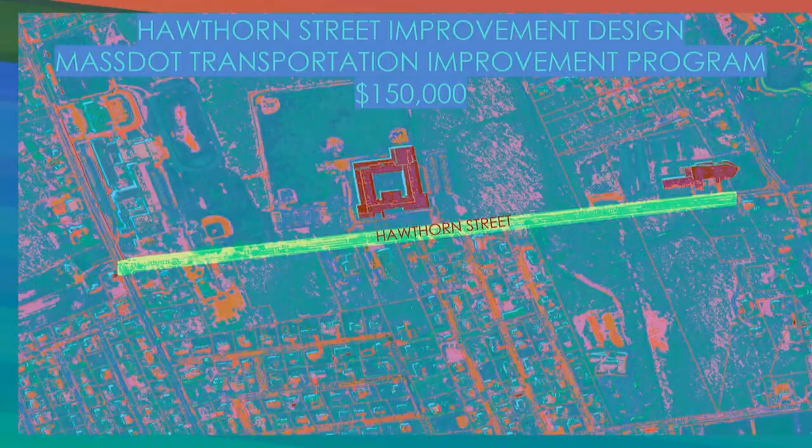This is an overview of the Hawthorn Street scope and area. We're looking for additional design fees to move forward with the design. This is the current concept design that we've submitted to Mass DOT.

We're still under the 25% design submittal. We've met with Mass DOT multiple times. We're looking at reconstructing Hawthorn Street from Slocum Road to the New Bedford line, and possibly including a portion into New Bedford to the intersection, so we can have connectivity with sidewalks, or additional shared use paths for bicycles and pedestrians. We'll also look at installing drainage improvements and intersection improvements at Hawthorn and Slocum Road.

I'm just wondering why the town's paying for these plans.

With the transportation improvement project with Mass DOT, for any town-owned right-of-way, the municipality will fund the design, and then once it's taken in as an approved project on the TIP by Mass DOT, they will estimate the funds and fund the construction.

So while we can fund a project like this — say the prices have increased, and it costs $500,000 to $600,000 for design — the state may take over the construction, which may cost $7 million. If we designed and constructed it in-house, we would have to put up all the construction funds ourselves.

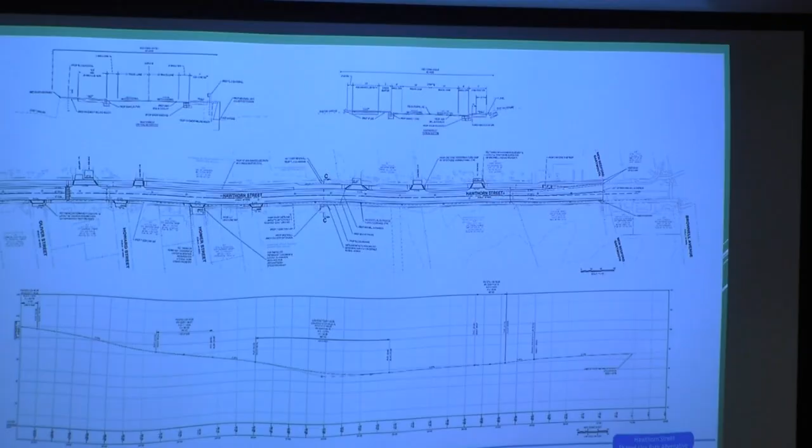Second project, Dartmouth Street Improvement Design. We started this project a while ago and submitted it to the state. It included Dartmouth Street from Howland to Prospect and Middle, and then Prospect from Middle to Elm.

There are some issues with the right-of-way of Prospect because it's so narrow to comply with all the design criteria from Mass DOT. We originally looked at a roundabout or a mini roundabout for this location.

Mass DOT wasn't happy with the design of the roundabout, specifically because it's a 5-leg intersection, which is a little awkward.

And in the vehicular movements around the roundabout, the tracking would go over the center island for large vehicles, like possibly fire engines and tractor trailers.

So we asked them to remove the Prospect Street scope and just focus on the reconstruction of Dartmouth Street, which has a wider right-of-way into that intersection.

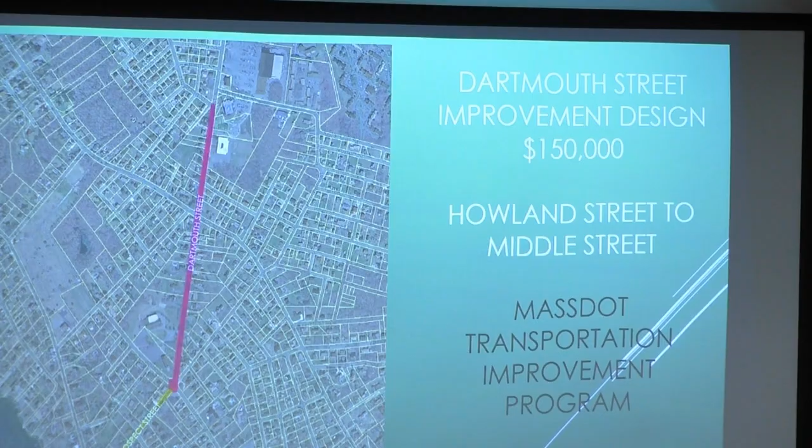Mass DOT asked us for an alternate design, so we looked at bringing Prospect Street into Dartmouth Street at a 90-degree angle. If you want to move to the next slide.

That would require land taking, and to me it's still a concern, because pulling out of that intersection directly is an issue.

Going to the intersection of Dartmouth and Middle, I have a traffic concern there. If you're hauling a trailer or something, you might get caught up if there's traffic at that intersection. So, Tim, for the roundabouts, can they reduce - are those plantings in the middle?

That's not a planting, that was just hardscape. Okay, so do they have a specific circumference that they use? Yes, they all do. They have a standard.

They're different sizes, so you can have large ones like you see down the Cape, and then they have regular size roundabouts, and they have mini roundabouts, which this is more of.

A mini roundabout fits more within the right of way, so there's less takings, but you have more vehicles that would track over that island trying to make that maneuver around it.

So you're requesting now just to go right down to the intersection at the bottom of Dartmouth Street, so you don't touch that intersection basically. Because if it's not broke, why fix it?

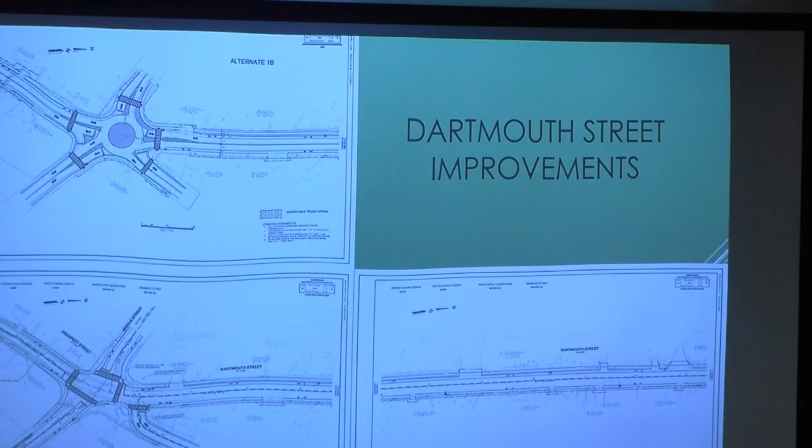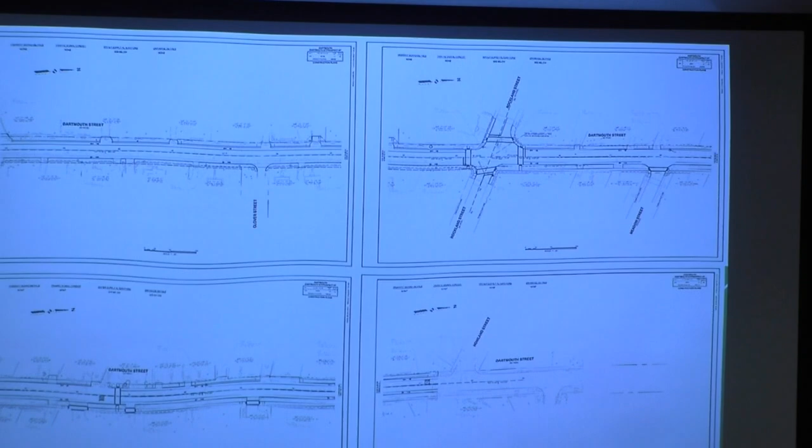And this is the rest of Dartmouth Street all the way to Howland through Meadow, with improvements including new granite curbing and sidewalk improvements, as we have in the former phases.

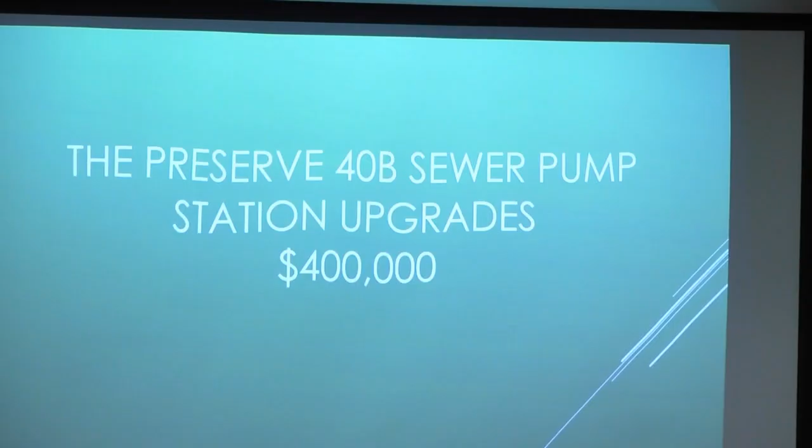The 40B subdivision has 288 units, and to be able to provide capacity in our infrastructure, 2 pump stations had to be upgraded.

The advertisement for bid had gone out, and the price came quite a bit higher than our estimate. So we rebid the project as a base bid for the Ellswick station, with an alternate bid for the Route 6 station. The Ellswick station is the most critical for capacity.

The bids came in still higher than our estimate, so we're trying to move forward with that one pump station, the Ellswick station, to get it underway and built with capacity, and then we'll try to re-advertise the second one.

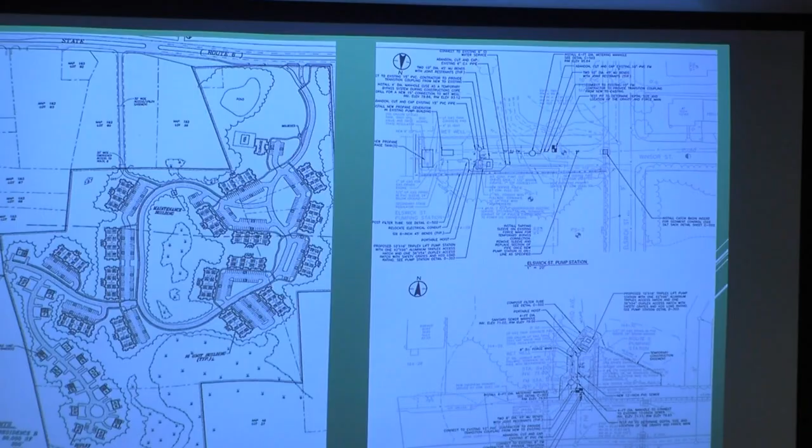Does that change what the 40B portion pays to the town? I know you had about 250,000 that they were going to contribute, in phases. But since the cost is higher, does that increase their percentage, or is that an agreement already struck that we're stuck with the rest?

Exactly. That was a negotiation done between the zoning board of appeals and the developer, and it's in the comprehensive permit - that's all they have to pay, regardless of increases in costs.

It's the same with any of our fees. Any connection fees that were updated after they applied for their permit, we can't charge them - they go back to the fees in place prior to their application, not their approval, their application.

FY '27 engineering capital improvement. This year, for FY '27, we don't have any capital requests for engineering. A lot of our engineering projects go through admin, so typically we have vehicles or equipment. Next year, we'll be looking at an additional vehicle to replace one of our existing older vehicles, but this year we don't really have any.

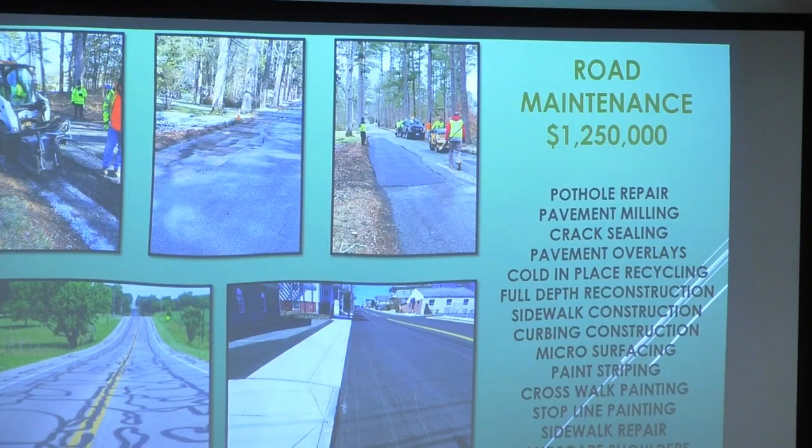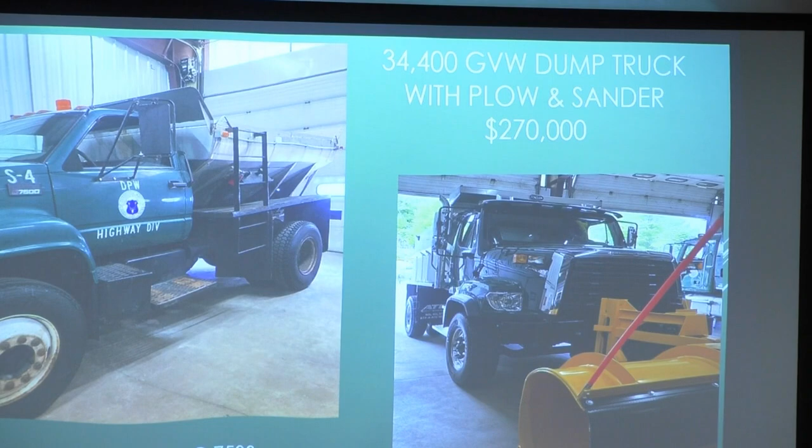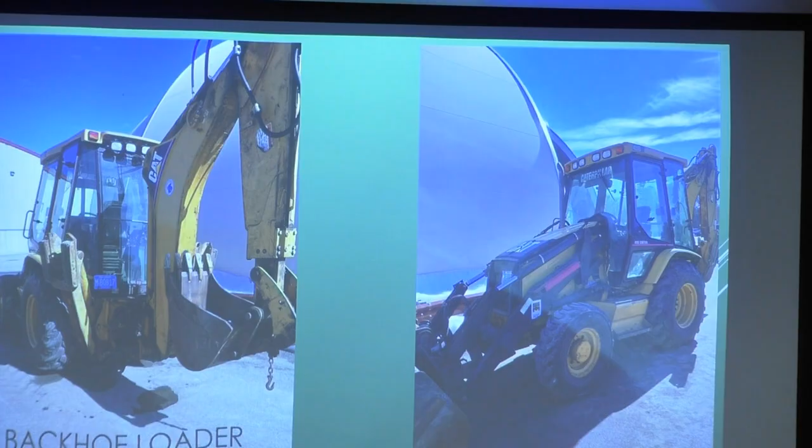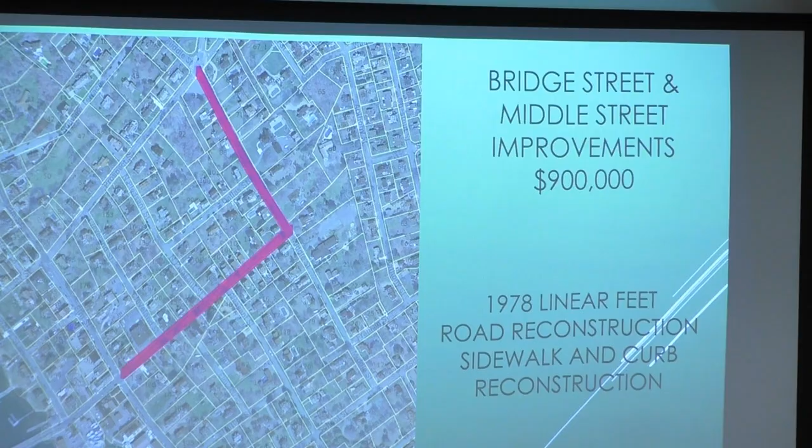Here we have our Bridge Street and Middle Street improvements for $900,000. It's 1,978 feet of road reconstruction, sidewalk, and curb reconstruction.

We've designed this plan in-house. It's 100% design, and we estimated it at $900,000.

I've also submitted to Complete Streets to see if we can get some Complete Street funding for this as well. They have increased the Complete Streets funding limits, so hopefully we can get some funding for this and move it forward.

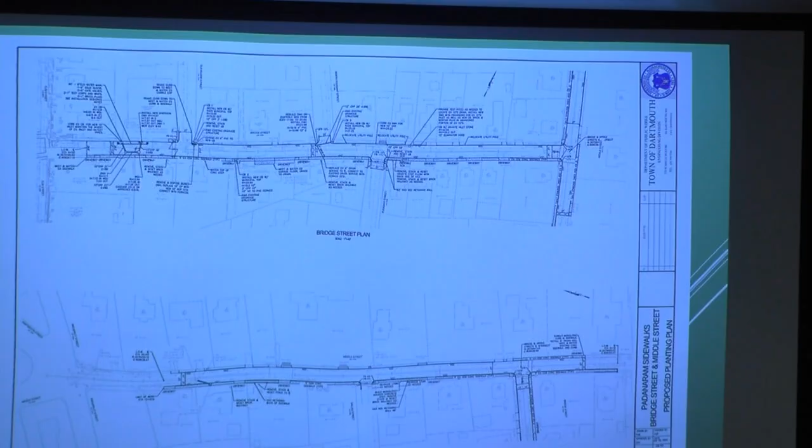Does that include the lighting and everything? No, Tim, just the base. That doesn't include any lighting or anything like that? No lighting, nope, this is just for the roadway improvements. If we add some lighting, that would be an addition.

This is our annual request for funding on Flag Swamp Road. It's 4,830 linear feet of reconstruction, about 700,000 dollars, which includes drainage improvements.

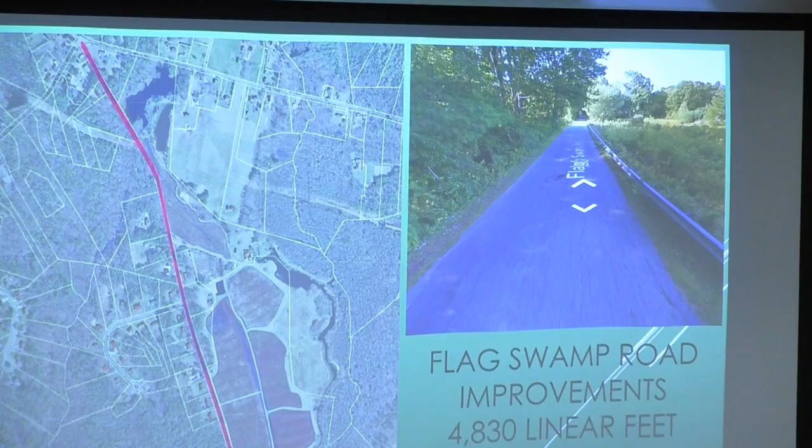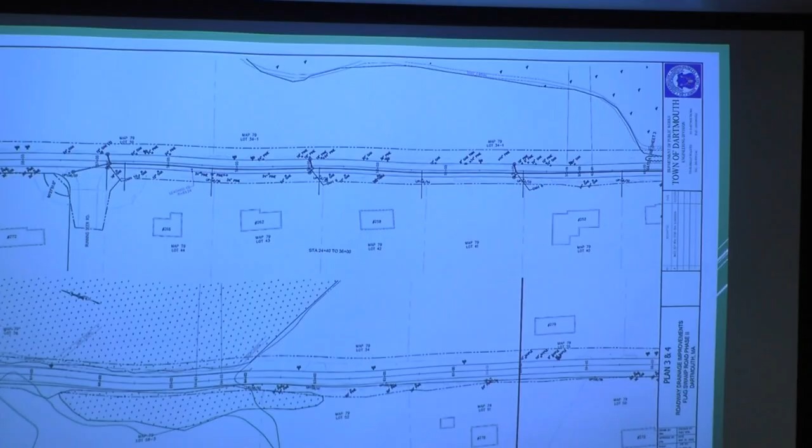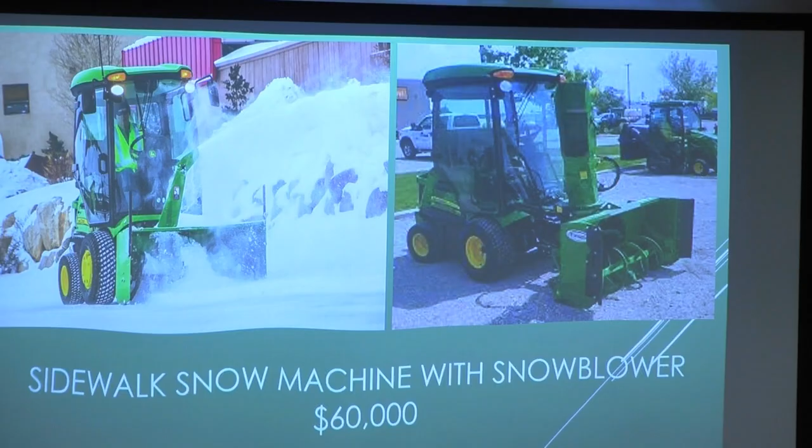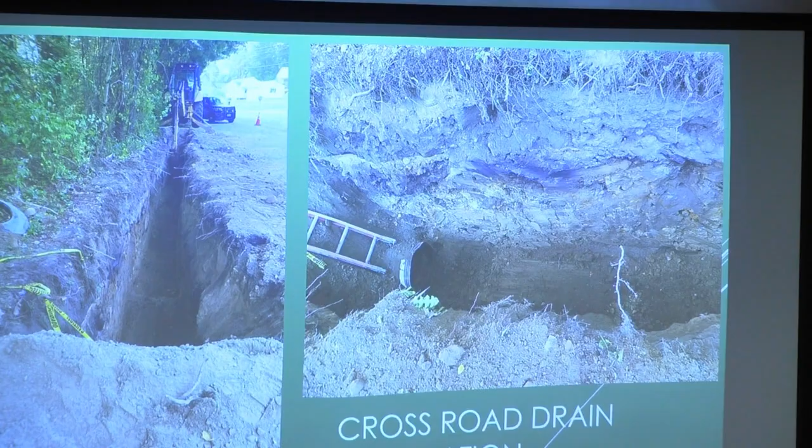These are from when we milled that section of Cross Road, put some signage up, and milled it, and after that prep was completed, we paved the road. We had a lot of feedback from completing that project.

This is the project that's just northeast of our project that's on the Mass DOT TIP plan, so that'll blend in with this project that we completed. The reconstruction with additional sidewalk improvements will be the next phase of that project with Mass DOT.

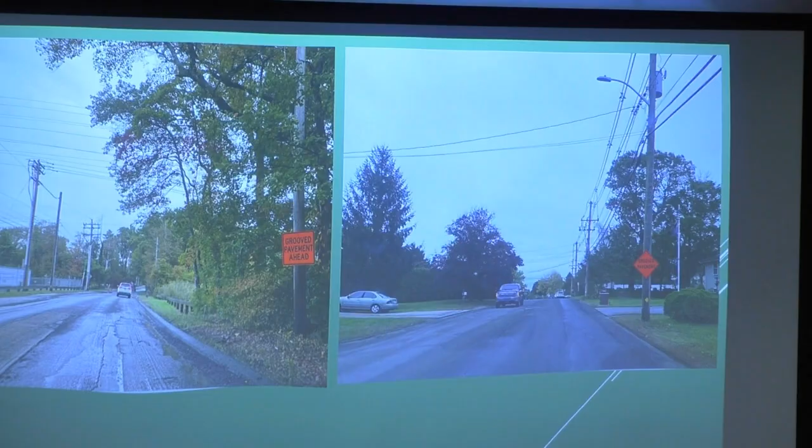These are just some of the roads around Bliss Corner that we've worked on and completed in the past couple of years.

Now, Tim, when the roads get a crown like that, like we talked about with Robert Street having the crown, is that taken down to meet the crown? So the crown is to promote drainage, to keep the rainwater in the gutter so it's not shedding across the road, especially during freezing temperatures, where if you have water sitting in the center of the street, you get a lot of icing. So it just keeps the roads cleaner with better drainage.

The sidewalk and curb reveal on Robert Street is very minimal, so we would actually have to take that road down lower rather than just doing a 1.5-inch mill and overlay. We'd probably go down a full depth or down to gravel, put down a binder course and a base course to bring that reveal back up so we don't impact any driveways or properties. Then we would reinstall new curbing and sidewalks.

That just happens over time because a lot of times we'll go in and years ago we wouldn't even mill and overlay, we would just overlay a road. You'd crack seal it and overlay it, and then you lose your curbing reveal. It's not the safest way to do it, because then cars can bump up on the curb without being stopped. With a 6-inch curb, it's more of a stop, but when you get down to like a 2.5-inch curb, you're just going to drive over it.

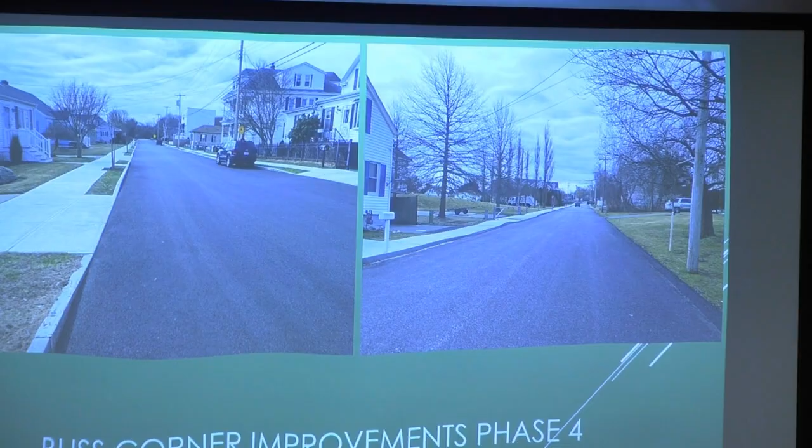And these are some of the completed streets. If you go back one - so some of the areas where you have a lot more houses, the grade works on one side where we put sidewalk and vertical curbing, and then some areas like on the right where all that land had a steeper pitch, a slope.

Installing a sidewalk there is a little more expensive because you have to retain behind it, since your sidewalk has to be ADA compliant with a maximum 2% cross slope. So then you have to retain that with either curbing or a retaining wall. So we chose to just install a Cape Cod berm, which is more economical, and you don't need a vertical stop when you don't have a sidewalk. That's why we did that.

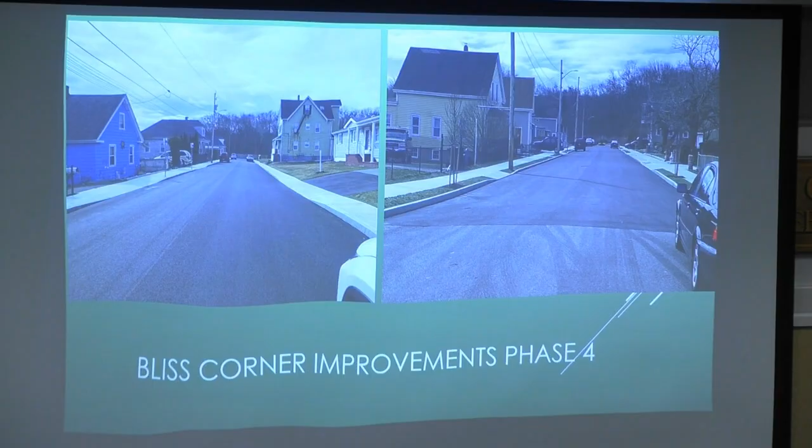Here we have sidewalks on both sides of the street with vertical curb and all concrete driveway aprons.

Same here. And here we show some of the landscape strips as well, with some existing trees, and then where there weren't existing trees, we added trees.

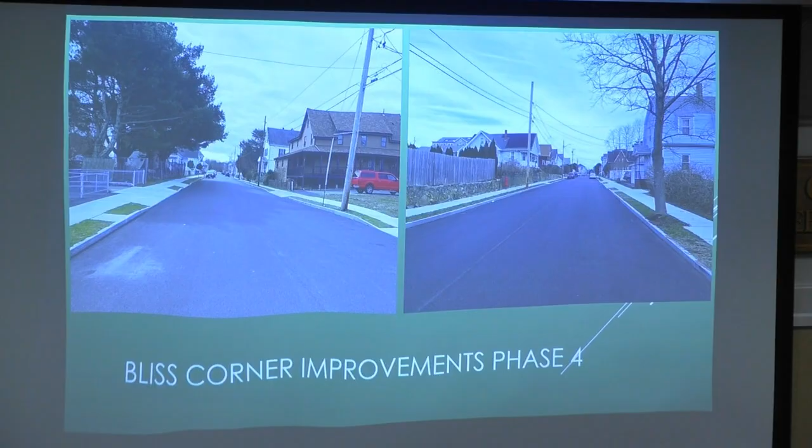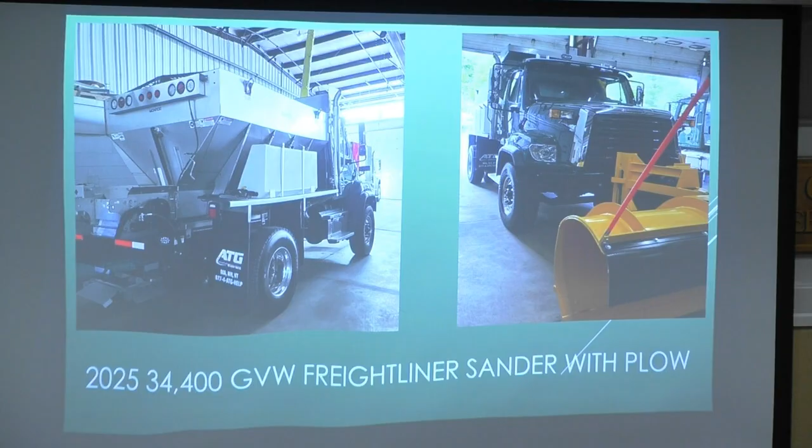Here's another one, this is a brand new 34,400 GVW Freightliner with a sander and plow. And this is the 26,000 GVW M106 dump truck with a plow, going out to actually plow.

So this one, you don't need a CDL for this? This is the one you don't need a CDL for, yeah.

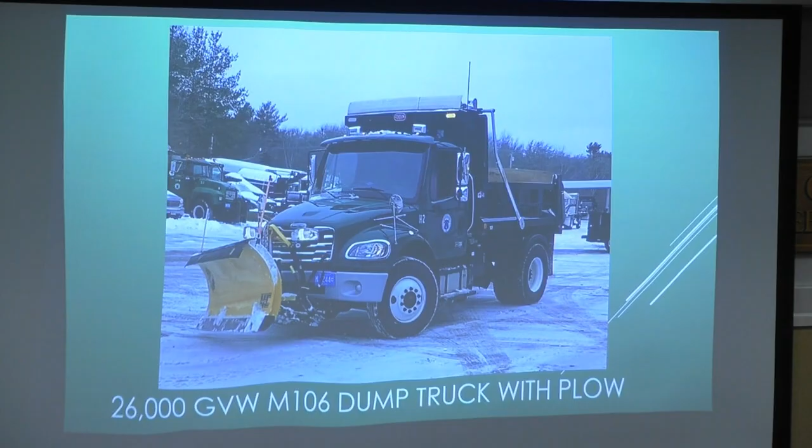FY '27 solid waste and recycling. So we have a Mack rear loader packer, still diesel powered, for 400,000. We still haven't heard on the state's requirement for electrification of these large vehicles, so we're trying to buy those diesel vehicles while we can.

And we have a... replace transfer, so we want to replace the scale house at the transfer station for about 55,000.

It's gorgeous already. Those guys are so comfortable up there. It is. The shed, it's two sheds. There's two sheds, yeah. The he shed and the she shed.

And then we want to replace a couple more of our steel containers, solid waste containers that are getting rotted and not holding water anymore. Yes, if you want to move forward.

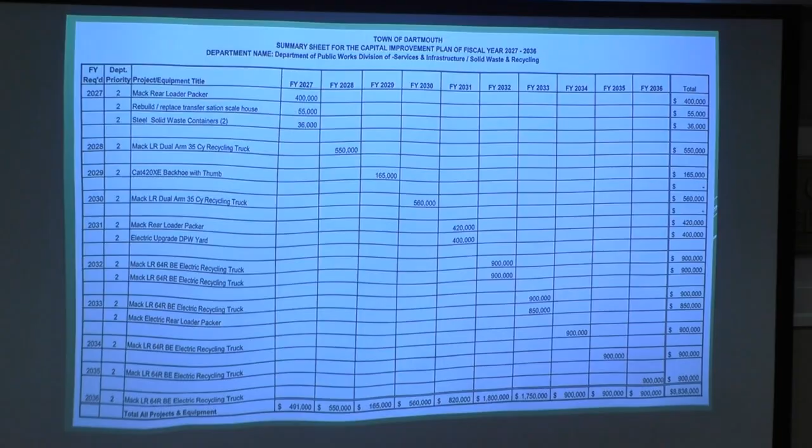So in the past, we would auction those off, but I think holding on to them for now is a better decision. So they could electrify that vehicle?

Not that vehicle, but the bill that was proposed was going to require, prior to us being able to purchase a diesel vehicle, that we had to purchase an electric vehicle.

So if it's an electric vehicle, one of these, a rear packer or a recycling truck, the costs are double what the diesel vehicles are. So they're like 900,000 to 1 million dollars, and they don't have the range that the diesel vehicles have.

So you need 2 to 1. So if we keep some of the older vehicles, we can spend about the same amount of money rebuilding that diesel vehicle. And since it's already ours, we're not purchasing another vehicle, so we can continue to use that.

Yeah, we did that rather last than this year. If you remember, we talked about it, we talked about the whole thing. 900,000 to buy an electric vehicle, and then I think we put half a million, $500,000, to rebuild. So we did pull back that article, right, so you can buy a new one? We still have that money in an article for rebuilding.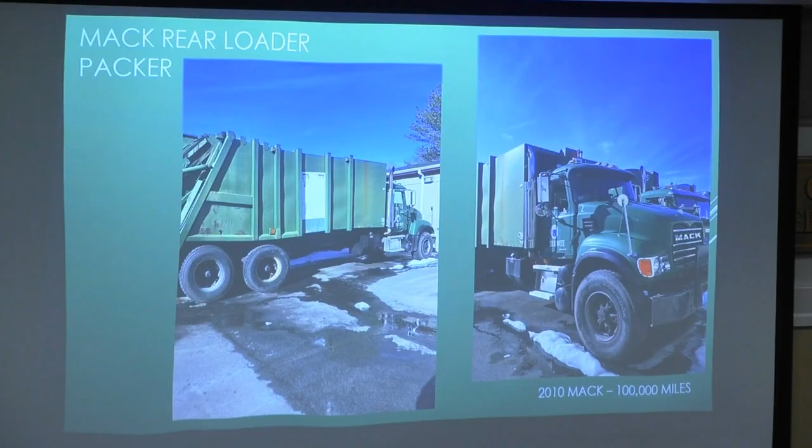We're also looking at some grants from the state for transfer stations and recycling to see if we can get any grants toward this. So we're working with the district on that as well.

And these are a couple of our containers that we're looking to replace, about 36,000 for two.

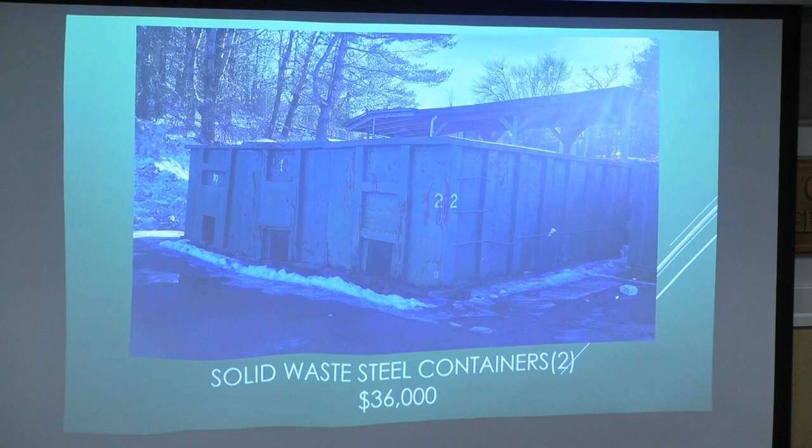DPW Construction Division Capital Improvement Plan. So we're looking at a Cat 930 wheeled loader replacement for $235,000, and a 6,800 GVW 4x4 pickup with a plow.

So here's our existing 2014 Cat front end loader, has 6,200 hours on it. $235,000 to replace it. This loader got a lot of use during this past storm.

Like it was up my street during the... It probably was up a lot of your streets, yeah. With the snow we had, at some point our trucks wouldn't even push it anymore, so.

Is this one at the town yard, or are you sharing? This is at the highway yard. Are you still sharing, weren't you running one up from your sewage treatment plant?

We do, yep. Weren't you sharing? They were running it over today, hauling some compost. So yeah, one loader stays at the wastewater treatment facility, and it does run back and forth.

Eventually we're looking at depending on what happens with compost in the future, because land application for biosolids is getting a lot of regulators looking at it, and possibly banning it for land application in Massachusetts, depending on contaminants. So if that happens, we may not be composting it anymore. But if we do continue to compost, our thought was to move that facility and process over to our yard, so we're not running the loader back and forth. Currently there's room up there, and we still use it.

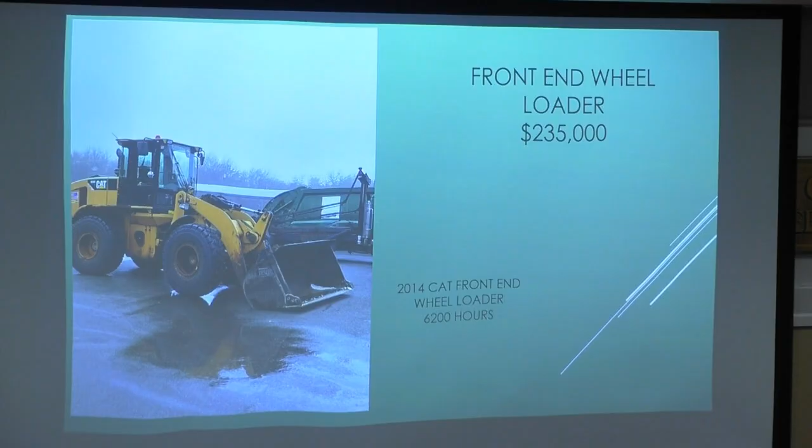Here's a 6800 GVW, just a regular half-ton pickup with a plow, replacing an existing pickup with 99,000 miles on it.

So, water pollution control FY27 capital improvement plan. First up is our aeration project. That's a 100% designed project, estimated at about $6 million. We do have some funding for it, and we're looking for another 5.2, which would most likely have to come from borrowing. We did apply for a grant for this funding and got denied, so we're looking for funding to move forward with that project, which will increase our treatment and capacity for biochemical oxygen demand and suspended solids.

Next, we have a new brush grinder. This was kind of a late add. All the residents who come in and bring brush that we chip up — it's not just your normal chipper, we grind it to a finer mulch to be able to mix with our amendment with our biosolids to create that compost.

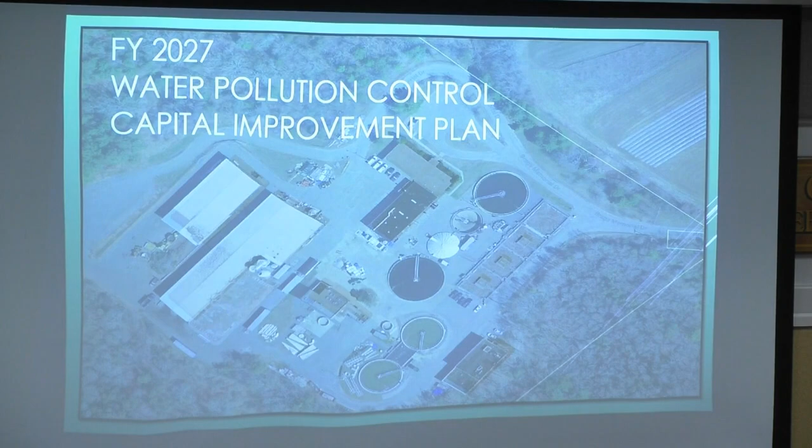This is one of our pages from the 100% design aeration plans, showing the schematic of the facility. Tim, it's important to note this is something that would be done regardless as part of a new sewer treatment plant. So for us to do this now isn't saying we'll have to redo everything in 5 years when we do a new sewer treatment plant—essentially this would be like phase 1 of the sewer treatment plant.

Yeah, and it would help us now with the load. Do you have a master plan for that? For the sewer treatment—that's not complete yet.

We put out an RFQ, a request for qualifications, for our comprehensive wastewater management plan. We've evaluated the qualification submittals, and now we're looking at moving forward with presentations and interviews, and then we'll select the consultant. That cost is in the $500,000 to $1 million range. We're working on moving that forward, hopefully within the next couple weeks. That's about a 2-year process.

That planning process looks at population projections, growth projections, and type of growth. In our former master plan, all the parcels on Route 6 were commercial, but all these commercial properties are being developed with multi-residential, which wasn't in our plan, and nothing was designed for that capacity and flow from each of those parcels. So it really takes up all the flow allotted for the rest of the town's residents, so we're re-looking at that and looking at where the growth might be. Looking at all these proposed residential projects, we see a good amount of growth.

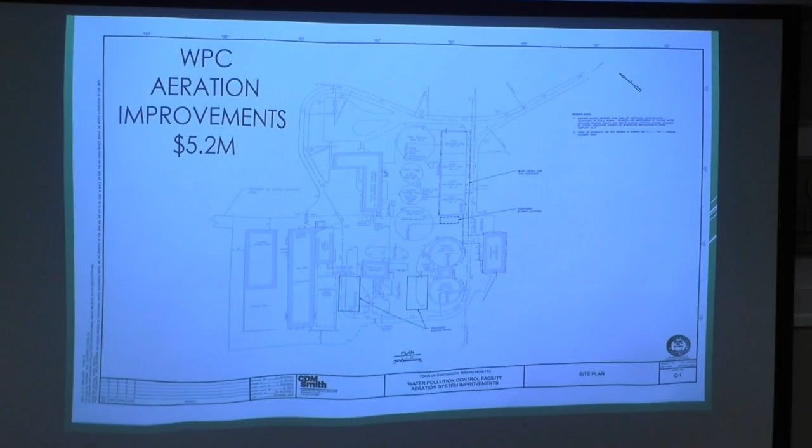Along with that, we're looking at how much capacity our facility has even with an upgrade, and what we can discharge to the bay. Do we have to look at other types of treatment facilities throughout town? Because the town is so large, is it feasible to pipe everything to that one facility, or do we have other areas where we have treatment, and where do we discharge? Can we discharge to groundwater? Can we discharge to other water sources? Those are all the questions that will be recommended on in that plan.

There was a town that was talking about discharging into the ground, and they're having a legal battle about that. It requires a much higher level of treatment for everything—nutrients, contaminants, everything.

Here we have some of our aeration—on the left bottom you see our diffusers. That empty tank needs some structural repairs and all new diffusers, so with the upgrade, that would be the first tank to be looked at and upgraded.

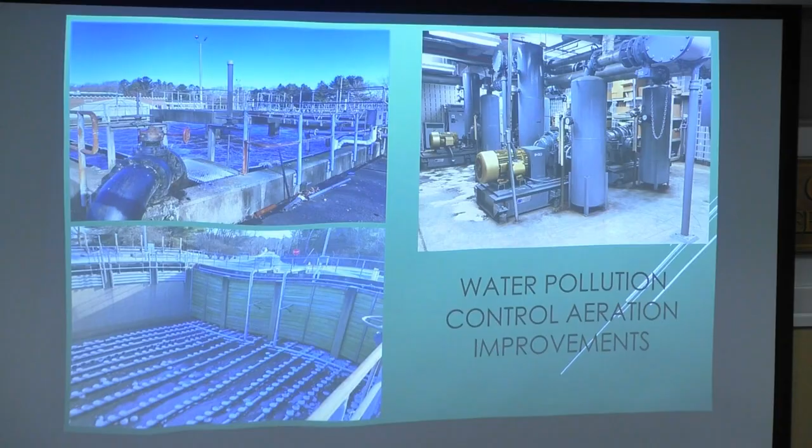Up top left, we have a full aeration tank in operation, and on the right top we have our aeration pumps. Those pumps are running 24/7, and they're old pumps, so they're not very efficient. We don't use VFDs for them, so they're either on or off—we can't fluctuate their drives. So if flows are lower, we can't turn them down, and when flows are higher, we can't turn them up.

But with new pumps, they'll all be operated off of VFDs, so they'll operate with the changes in flow. It's a lot more efficient electrically, and actually in regulating how much you're aerating.

This is our existing 2015 brush grinder that we're looking to replace. Last year we replaced the whole exhaust system. This year we've done some additional repairs, and the whole conveyor needs replacing.

It's a relatively low life cycle, huh? 10 years, yeah. What would the trade-in value be on something like that? It's a good question, probably not too high. But if you could get 100,000 for it, it'd be something. Yeah.

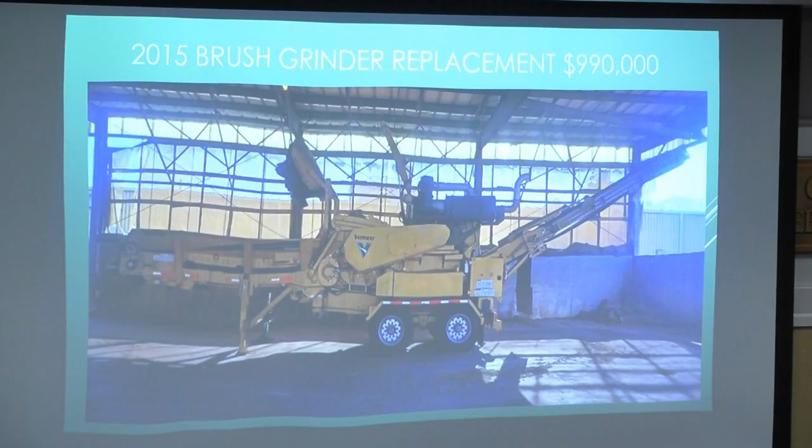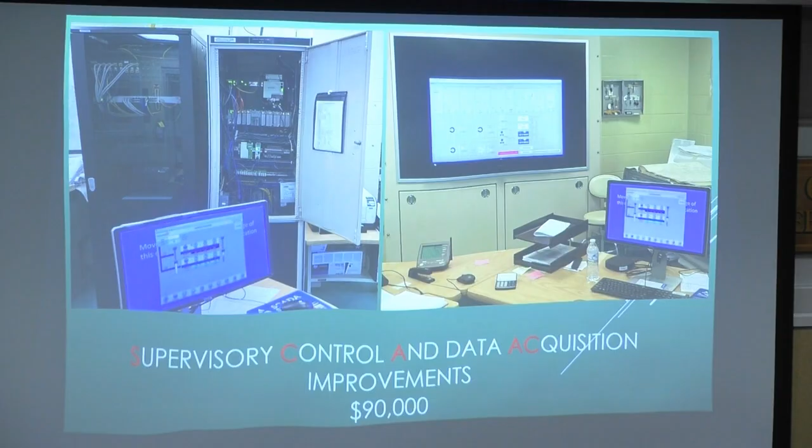Some pictures of crews out working on some of our infiltration remediation, raising the heights of sewer manholes, installing new watertight covers, and then sealing the outside with a butyl sealant.

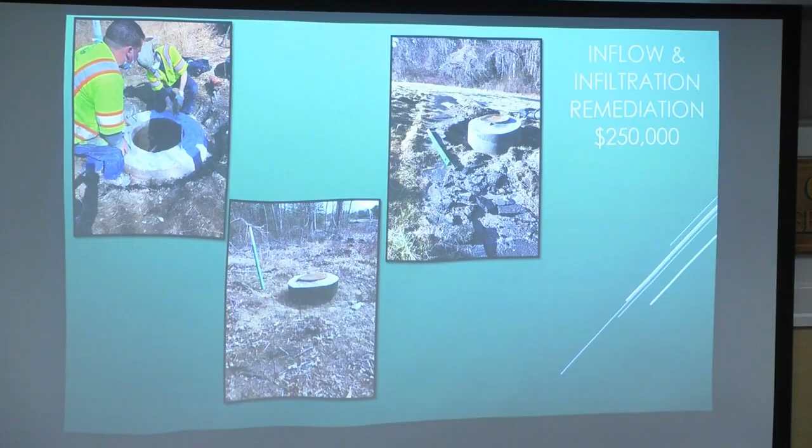Flow meters and chart readers for our pump stations, looking to replace those as well, for $125,000.

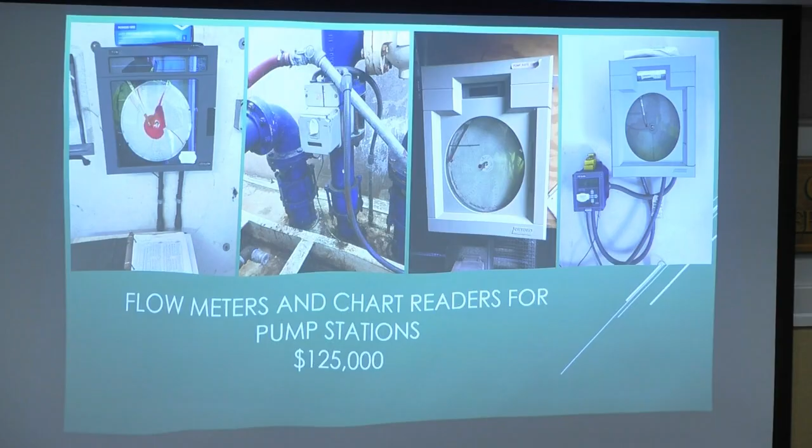This is an older picture of our preliminary treatment, the bar screen, the grit removal chamber. Basically everything comes into this facility first, and there are large chains and buckets that scoop all the solids up out of there. Sometimes you get anything from false teeth to Matchbox cars, you know, it's pretty disgusting.

I witnessed it, I went up there, so.

So we have four of these, and we're upgrading them. They're about $100,000 to upgrade, but we're doing it in-house, so we're purchasing all the equipment. We got funding for one last year, so we've gone through one of these, and it's in good shape. Now we're going to work on the others.

Tim, do we have a process in town where if we find that a resident is putting, like, washing machine discharge into the system, is there a fine for that? No, actually washing machines are supposed to be discharged to sewer because they have contaminants, but sump pumps can't.

So we have a program, as we work, if any of our water division personnel are working on a meter or anything, they'll inspect to see if there are any illicit connections, like a sump pump. And through our I&I program, they do the same thing, going house to house to inspect for any illicit connections.

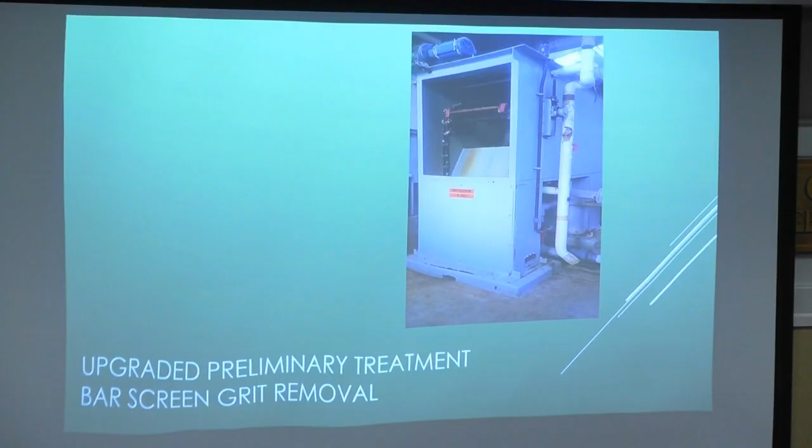And this is basically just comprehensive, on the left is our comprehensive master plan from 2012 that we were looking at upgrading, and just another picture of our facility.

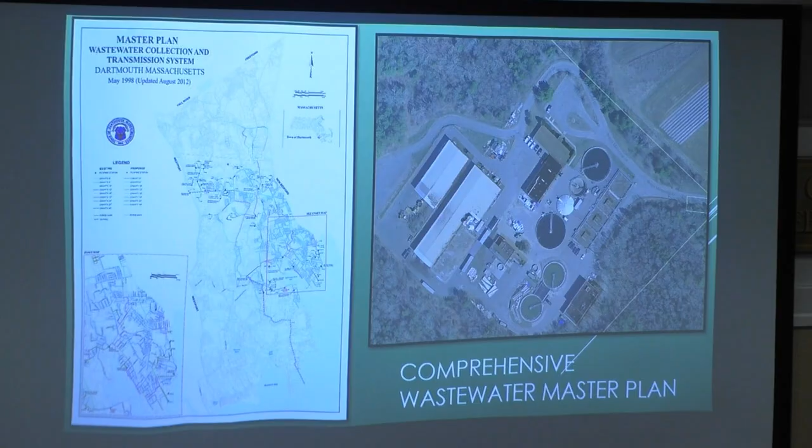FY '27 water and sewer capital plan.

So we have filter valve replacement for $150,000 at our 299 Chase Road facility.

Let's see, 579 Old Westport Road, water treatment facility construction admin services. So we've funded the admin services to this point. We need about another $100,000 to finish the project. The project is coming to an end, luckily, most of the work is completed over there. They're testing the piping and trying to get that new CT piping online so we can get the Pinelli wells back up online.

Faunce Corner Road Pump Station centrifugal pump rebuild for $47,000.

Then we move to our next facility upgrade, which is our 687 Chase Road facility upgrades. The design is estimated at $350,000.

The next one is a Route 6 water main replacement upgrade on Route 6, from Faunce Corner Road to just east of Hathaway Road. If we get funding for this, we can do this work in line with the Route 6 work that MassDOT is proposing, or moving towards. It's in the TIP, they're currently at 75%, working towards 100% design. They were planning on bidding that project this spring to start construction in the fall, but it looks like it might be pushed a little further in the year, maybe start construction next spring of '27.

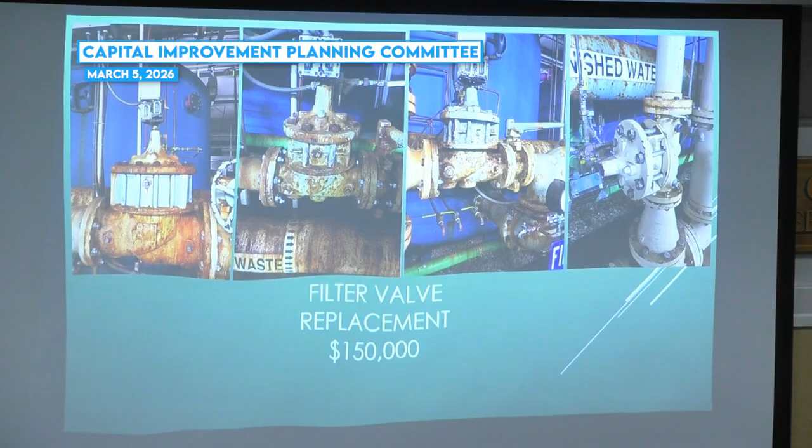This is the 579 Old Westport Road facility improvements, so there's a basically schematic site plan and then some of the elevation plans of the improvements.

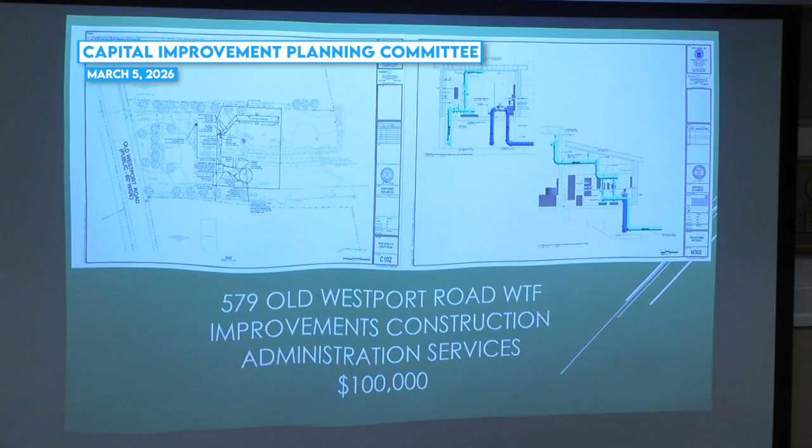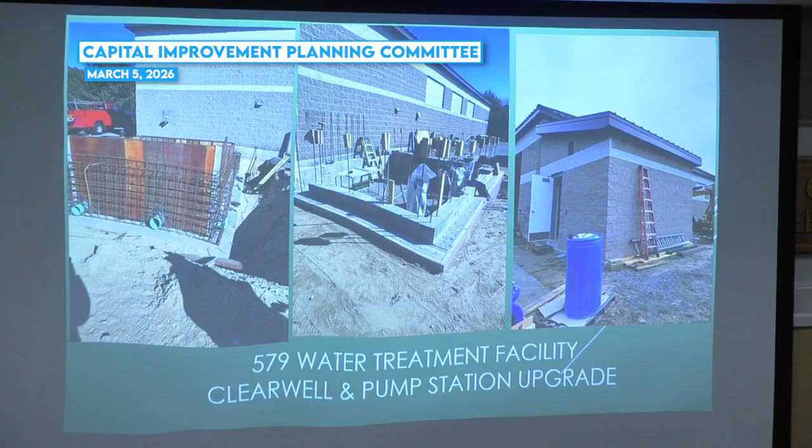And these are pictures of the improvements, when they were working on the addition on the left, forming it, the walls in the middle, and then the full concrete masonry unit block walls that match the existing building, completed there.

This is our clear well, so this is our backwash tank, to improve quality out of this facility. When we backwash, a lot of times we draw water from the supply, so now it'll just go in and out of this tank, and it won't disturb the lines out on Old Westport Road.

That piece of pipe sitting on the ground, that's part of our contact time, or four-log pipe, that we ran a loop around the facility in the yard to increase that contact time, so we could turn on the Pinelli wells.

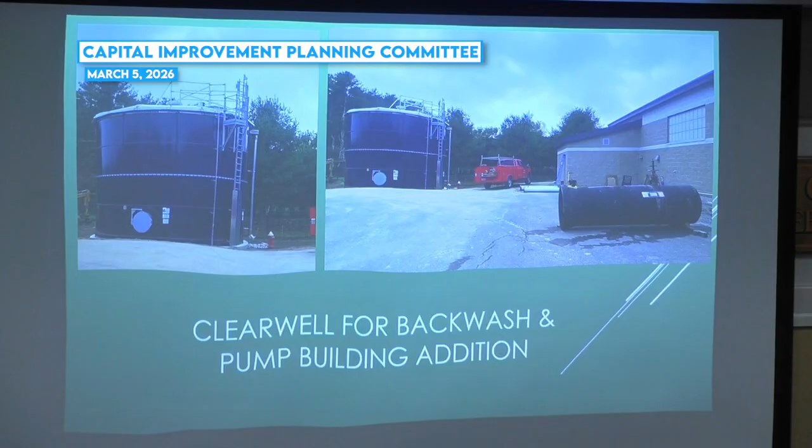These are some of the piping, all the light blue or whitish piping you see up to new painting, that's all new. On the left, that's all the piping and pumps in the new built addition, and then the two right photos are in the existing building with our sand filters.

So this is 579, this is all inside. This is all work that has been completed.

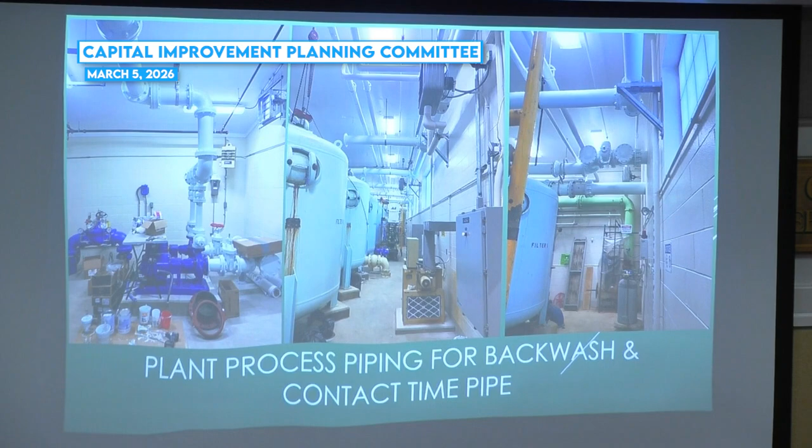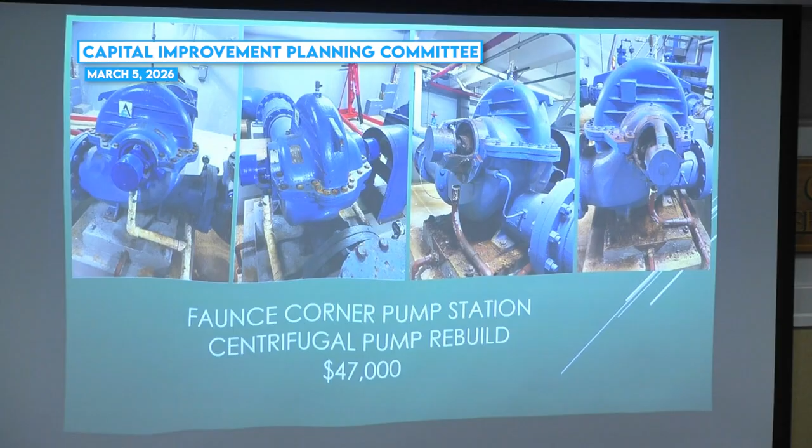And this is at our Faunce Corner pump station over near the reservoir, looking at rebuilding the centrifugal pump for $47,000.

And this is our 687 facility. So we have our treatment facility and our wells. We're looking to design upgrades for this facility for $350,000.

So again, looking at contact time pipe, four-log. The pipe from the wells needs to be increased as well, because years ago the demand wasn't as high, so they used a small diameter pipe. So to get both pump stations operating together, we've got to increase the size of the pipe.

And then we have another clear well, aeration upgrades here, and the lagoons need to be reconstructed, the backwash lagoons, so whether they get constructed in the same place or we have another area on our site to reconstruct them.

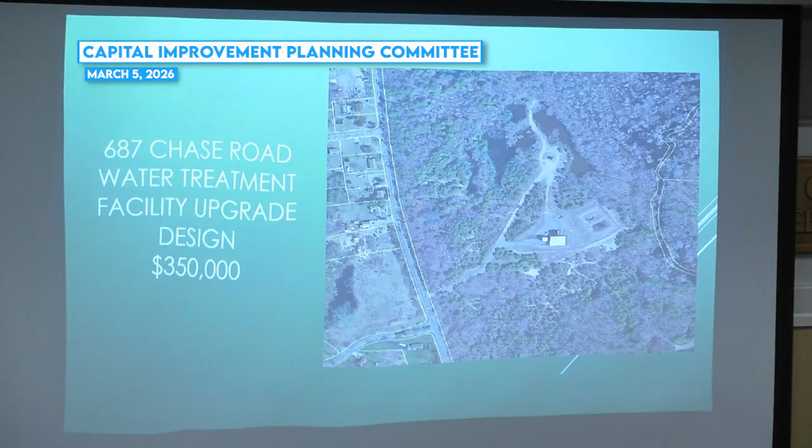So, the picture didn't come up. That was just our drinking water source supply engineering, for $100,000.

This is our Route 6 12-inch DI water main replacement. This is all designed in-house. So we designed the full replacement, and the construction is estimated at $1.2 million.

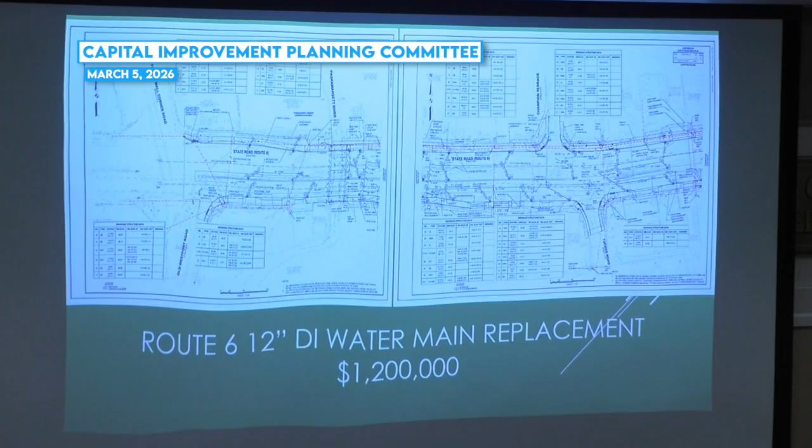Just another replacement of a half-ton pickup truck for the water division, $49,000.

And one more, a Ford F-550 four-wheel drive with a dump truck and plow. We had a lot of trouble with this snowstorm, we needed a lot of the larger trucks, so our smaller trucks couldn't really do much. So we're just looking for an additional plow truck for the water division.

That's more of a utility truck, right? Yeah, it's a utility truck. It's an F-550, so it's a larger Ford, but it's a dump truck and also with a plow, so we can plow with it. And that's it.

Any questions? Yeah, that's a lot to take in. I did see that a lot of your stuff is like 2s and 3s. You did have some priority 1s further down. Yeah, so our ones are usually immediate needs, water, wastewater stuff. I know, let's see.